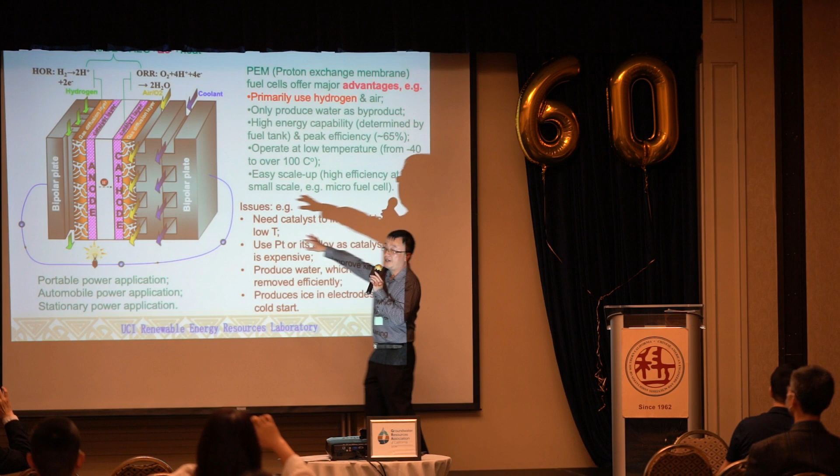Go back to this technology. This device is very novel, innovative, and can possibly change the world in how we utilize our energy, like a Tesla. So if we replace this device with a battery, and instead use a chemical inside of the battery, we put hydrogen gas and air into the battery, and this battery will produce power. Then we release water to the environment, so it's clean.

The advantage here is we use hydrogen as primary fuel, and hydrogen is renewable. It was hurting when I drove from Irvine to this nice 4-star hotel for this conference, because the gasoline price has been hurting in the past 2 months—I think it's a 30%, 40% increase.

The reason is because of this kind of dependency. There's a war somewhere, there's tension in the world, and the price can change almost every day, every moment, with fluctuation. So if we're working with hydrogen, what becomes clean, renewable, or sustainable? It depends especially on renewable resources like solar, and will be pretty much independent of those price changes. Even with the war between Russia and Ukraine, the price will be the same.

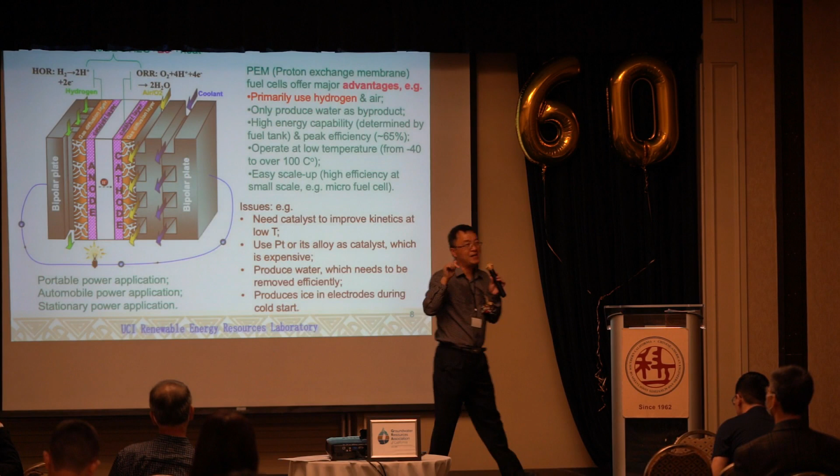Most exciting, the Department of Energy in the US has a target of $1 per kilogram of hydrogen within 10 years. What that means is, if your current driving range is 300 miles, you need 5 kilograms of hydrogen, so you'd only need to pay $5 for the fuel. Again, that's the benefit for hydrogen.

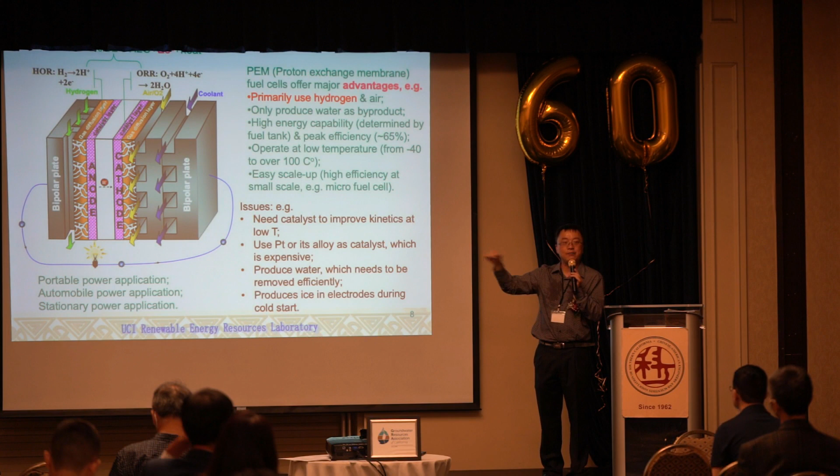Another benefit is efficiency: 65% peak efficiency in practice, and 80% in theory. 50% is normal in driving efficiency, over 50%. Also low temperature operation, minus 40 to 100 degrees C. They easily scale up, just like a battery, put one by one, and you can put a million in a solid state for high power.

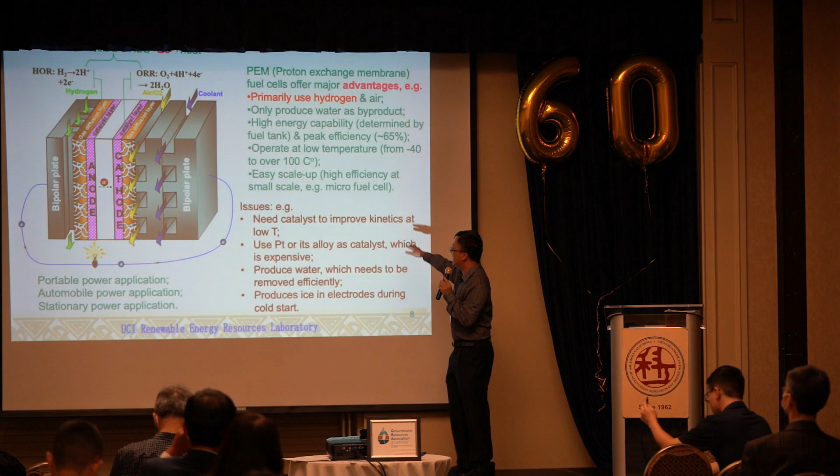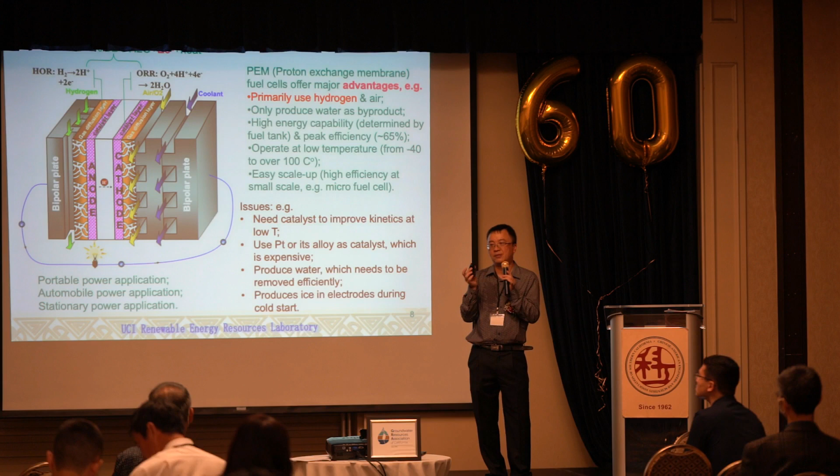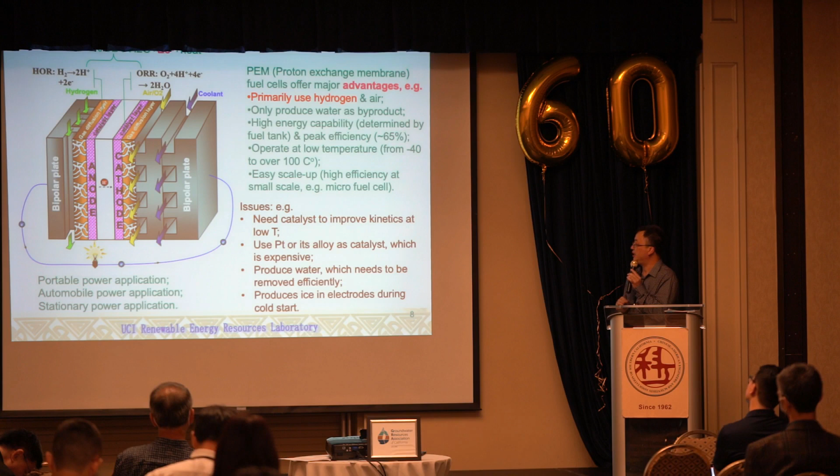So again, there are a few issues here, I listed some for the application. You can see fuel cell is looking for a replacement of battery, right, in our cell phone, even the mouse. If you have a hydrogen fuel cell to power your mouse, then you need to change it in certain containers, because you can have a hydrogen tank cartridge plug-in, which is more energy intensive.

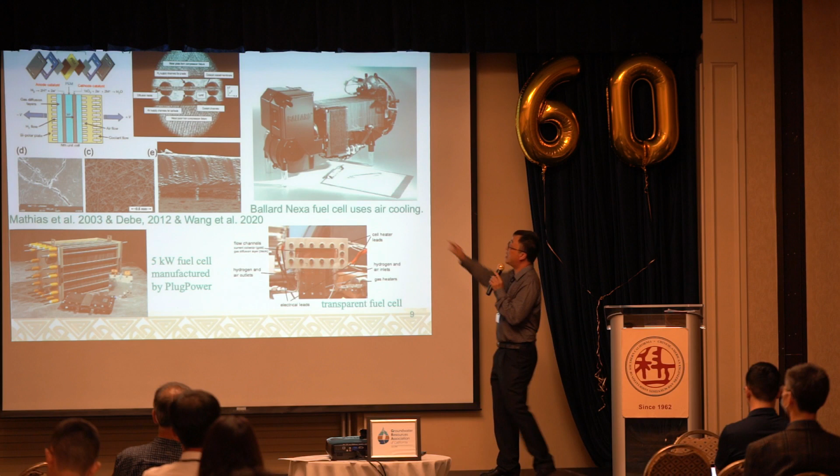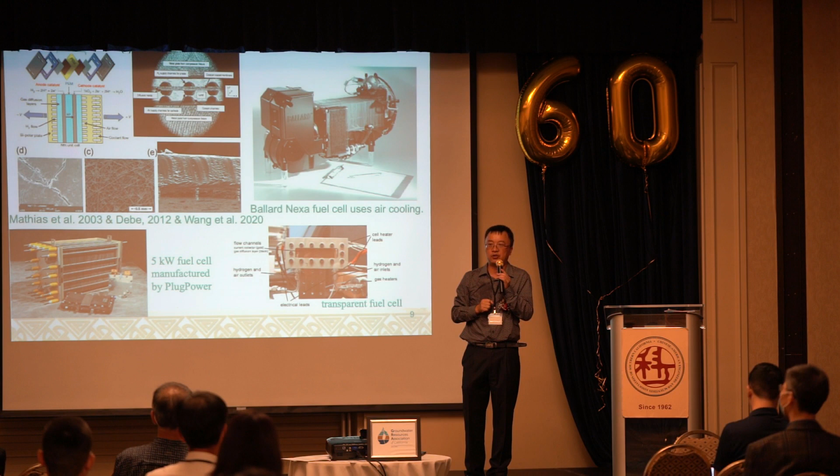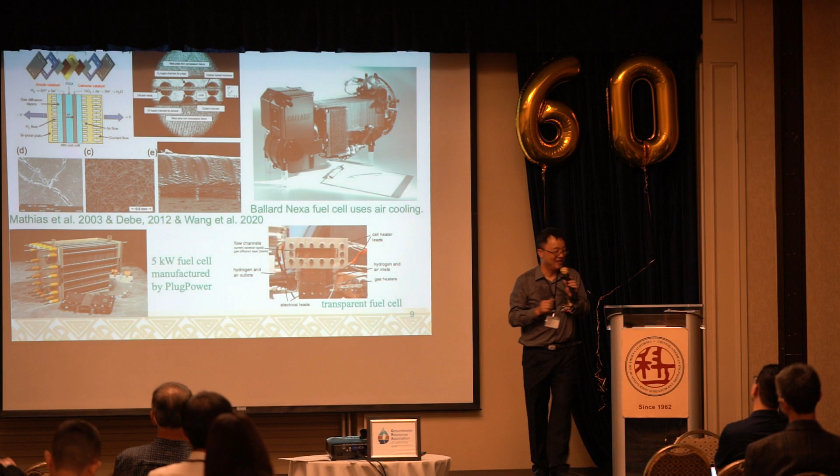Go to the next slide. So it's not just schematic, there's real stuff going on—this is the structure, the material. Again, there are challenges, materials and innovations needed, and we need some funding, and there will be funding and investment coming into this technology. There's also this kind of fuel cell stack, another 5 kilowatt stack developed by a company. If we know the operation principles, we can design a transparent fuel cell and observe what's happening inside.

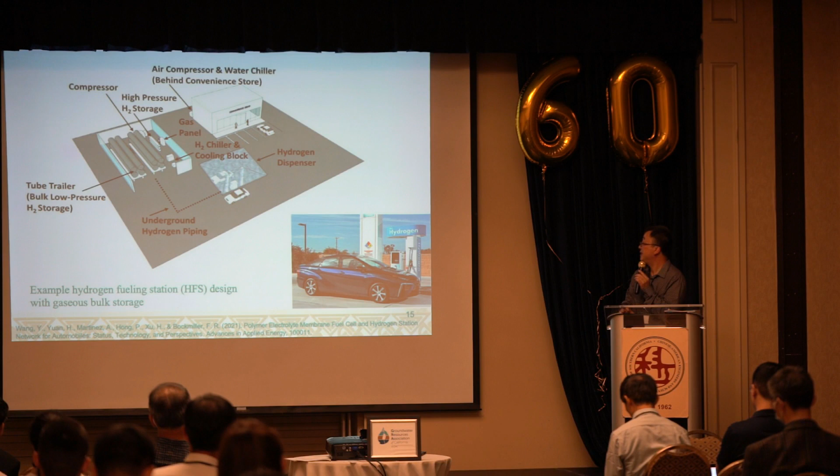It's durable. As I mentioned, the DOE will invest over $1 billion in the following 5 to 10 years into hydrogen hubs, which is very likely going to be in the state of California.

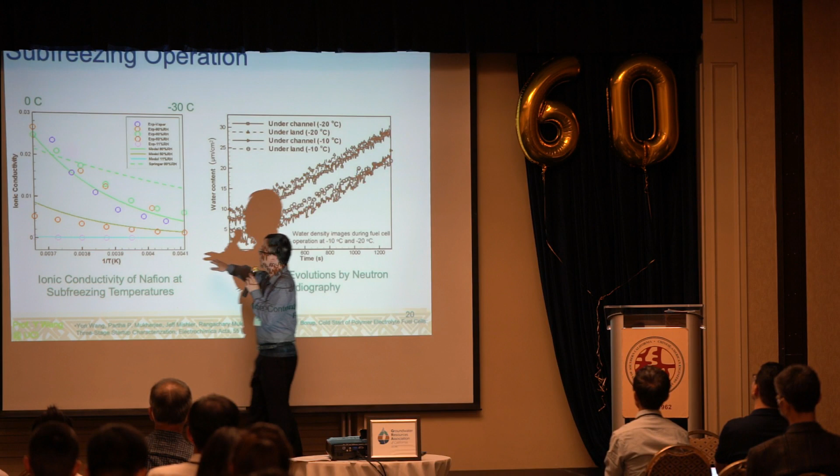The fuel cell needs water to function, the membrane to conduct protons. So we worked under sub-freezing temperature, as low as minus 30 degrees C, and we measured the ionic conductivity of the membrane under different temperatures and different water content. This is our early work.

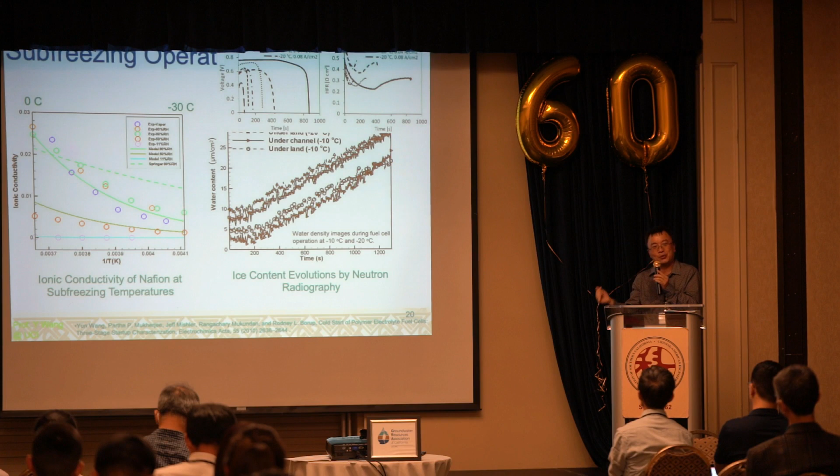You can think about it, and what's going to happen here is this kind of voltage. You can look at this voltage as a battery. First it's steady, and then once there's too much ice inside the fuel cell, it will block oxygen transport to the reaction site, and then the voltage is going to drop to zero, which means fuel cell dead.

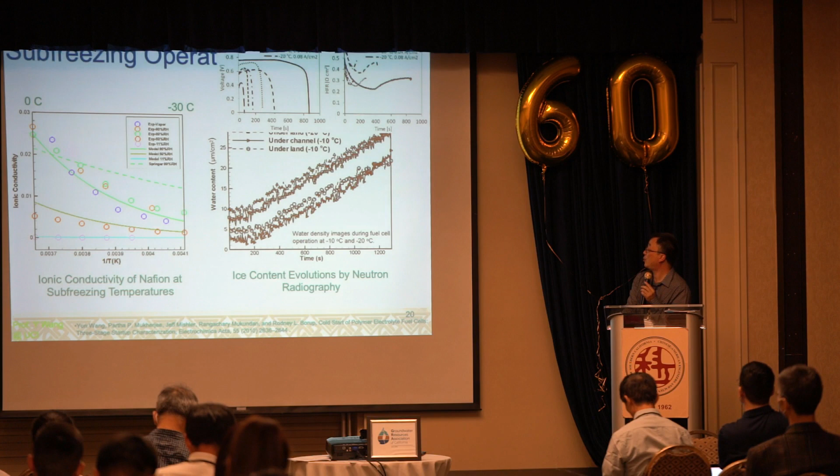So here, that's our work. We do have some fundamental and original contribution to analyze how cold start relates to fuel cell or electrode design, what's the major physics there, and what are the parameters at play. This is the time scale or time constant we provide, to facilitate hydrogen fuel cell development to overcome this kind of environment.

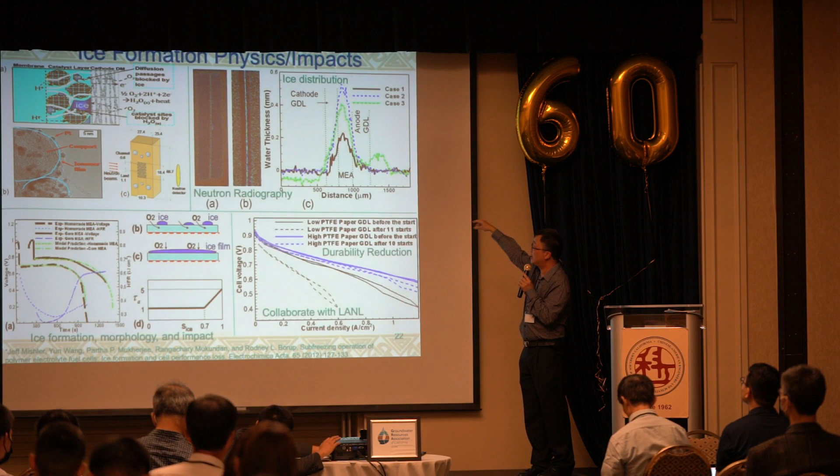So we have some physics showing this ice formation physics impact with neutron radiography, high efficiency, and we also have durability studies to improve cold start performance.

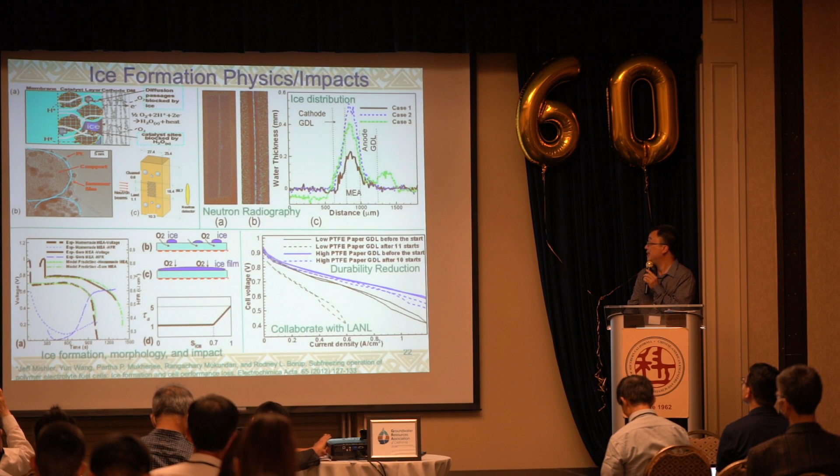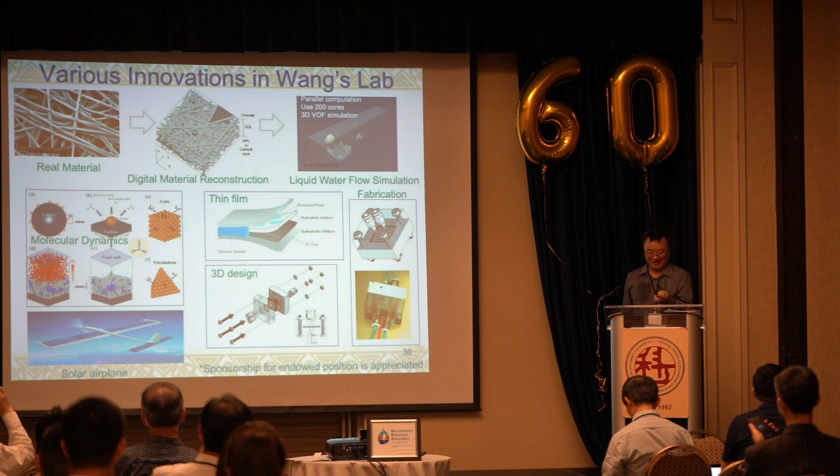It's a very fantastic presentation. I do believe the hydrogen fuel cell car might change the vehicle market in the future. Right now we have 3 minutes for Q&A, please don't hesitate to ask questions.

My question is regarding your safety. Do you have any safety concerns when you use hydrogen with your cell?

That's a very good question. Bringing it back to the safety concern of the hydrogen tank, if you pay attention here, the hydrogen pressure tank is around 700 atm, bars. So it's very high. With this kind of pressure, the tank can hold sufficient hydrogen fuel to support 300 to 400 miles of driving range.

However, we can provide technology to make sure the safety is under control. First, people use carbon fiber to give additional strength to the fuel tank. Technology-wise, this will be 100% okay, and it passes DOE safety code.

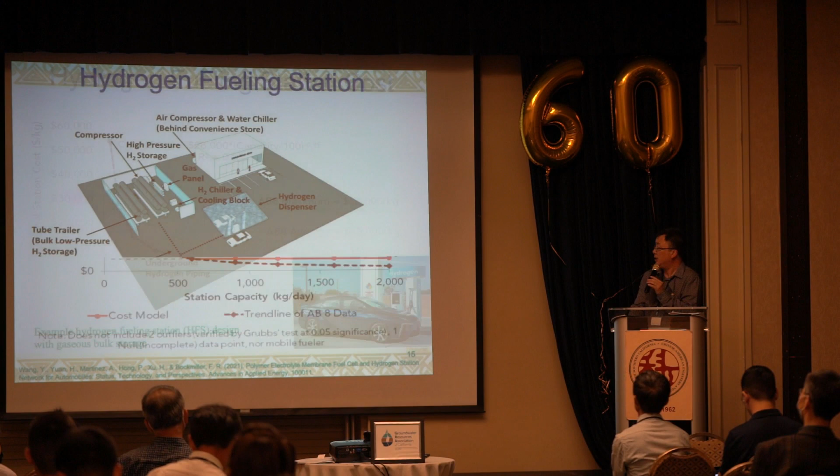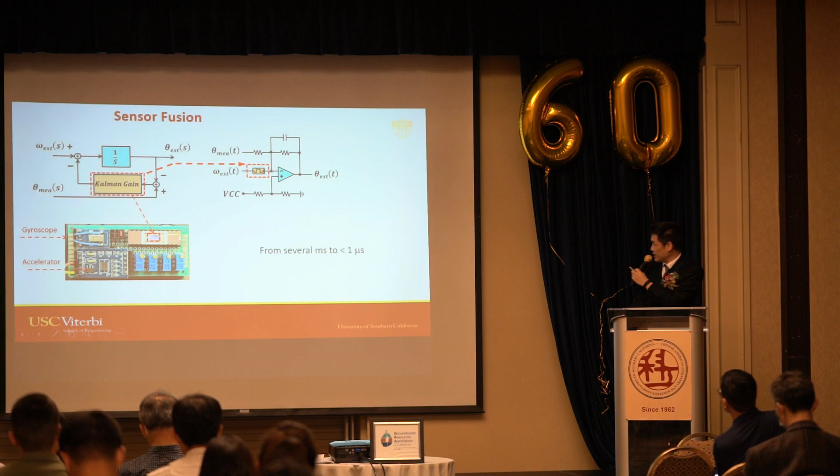It's tunable, so we represent the Kalman gain in the circuit using this memristor, using different resistance values of the memristor. And here's a movie that shows it.

So here on this robot arm, we have our sensors and the Kalman filters. On the oscilloscope, you can see on top the noisy one, that's a direct measurement of your angle. The bottom one is after the Kalman filter. You can see it looks much more smooth with much less noise.

When I showed these results to some of my friends, he asked me, why can't you just calculate what should be the Kalman gain, calculate what should be the value of the resistor, and just put it in your circuit?

Well, it turns out that the Kalman gain is actually determined by the signal to noise ratio of each sensor. And for the exact same model of sensor, the signal to noise ratio may not be the same. For example, we bought from Amazon 4 different gyroscopes, exact same model. If we use the same Kalman gain in the circuit, only gyroscope 2 gives us the perfect condition, gyroscope 1 will undershoot, and gyroscope 3 and 4 will overshoot.

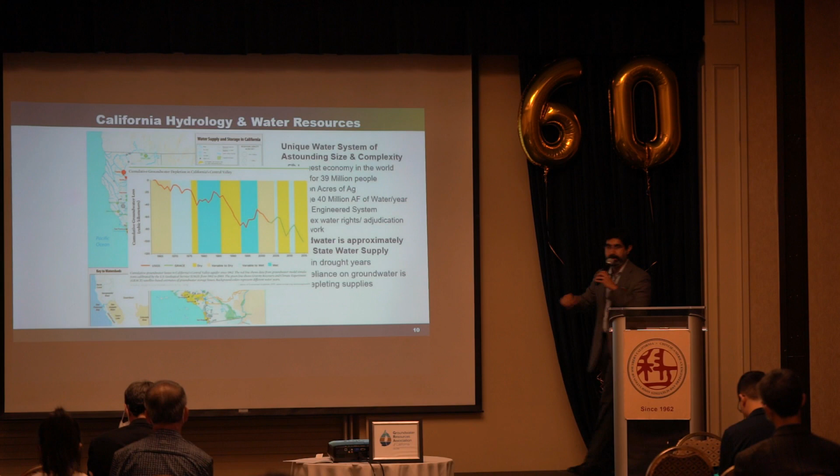So it causes all kinds of issues, and of course, as the supply goes down, we just have less groundwater to tap into during drought years. So this is a very critical issue for the state.

California has a Mediterranean climate. There are very few places in the world that actually have a Mediterranean climate, apart from the Mediterranean, of course, South Africa, parts of Australia. And basically these are characterized by two aspects.

One is that most of the rainfall happens in the winter months. We don't get a lot of storms, we don't have monsoons, for example. I come from India, I grew up in India, and there, in the summer, you have the monsoon rains. This is important because think of when you need water the most. You need it in the summer. In our state, as other Mediterranean states, most of the rain comes in the winter, when you need it less.

In California especially, most of the rainfall is in the north of San Francisco, and in the east, in the mountains, the Sierra Nevadas, where it becomes snow. But think of where most of the demand is. We've got Los Angeles and the greater Los Angeles area, with millions of people. So our demand and supply centers are a little offset.

California water hydrology is driven by ENSO cycles. You hear about an El Nino year or a La Nina year, and these are years where you either have more or less precipitation. We're currently in a La Nina year. It's looking like it's going to continue to be a La Nina year through the rest of this year and maybe next year as well.

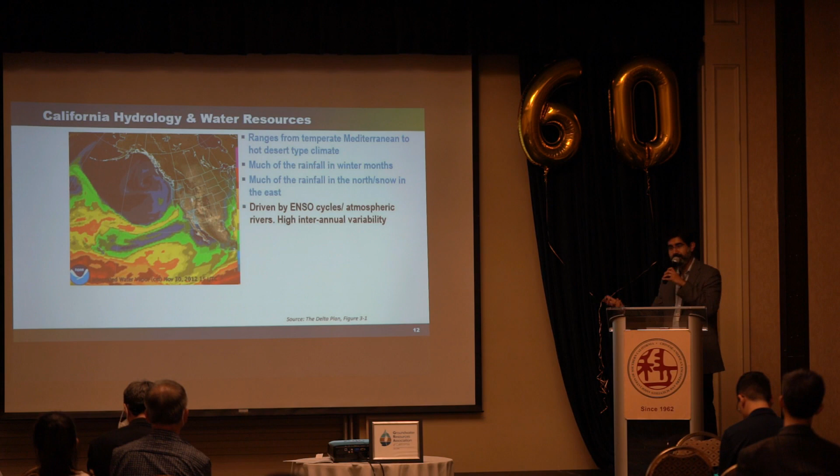And so what this causes is there's a lot of interannual variability. There is really no such thing as an average water year in California. You either have very wet years or very dry years, all right? So you also have an issue with timing.

2022 is looking pretty grim. We've had one of the lowest snowpacks in the Sierra over the last 50 years. So along with this variability, we also have very high water use in Southern California, because that's a big urban center, but also in the Central Valley where we grow most of our crops. So that's a big agricultural center.

And so what California has done, and this has really driven growth and development, and made California the 5th largest economy in the world, is we have a highly engineered system of connecting the dots. We take water from where it's available and we convey it and store it in areas where it's needed. So it's a demand and supply connection across the state.

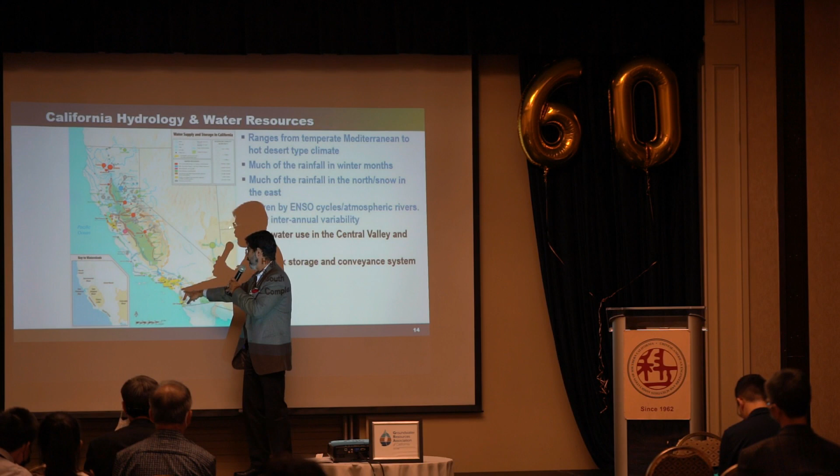We bring water all the way from the Delta near Sacramento down to Southern California. The water is used to feed agriculture in the Central Valley, through the Central Valley Project. We get water from the Colorado River that feeds San Diego, parts of Los Angeles County as well. So we're getting water from these different areas, connecting it to the demand centers, and then managing the timing and the location. It's a very complex storage and conveyance system.

It's also aging. We need to upgrade this infrastructure. I'm not going to talk about that, but that's part of the issue that we're facing in the state.

And what's happening with climate change is that we see a shift in the seasonal patterns. We're seeing less snowfall. The timing of snowfall in the Sierras is changing. We're seeing hotter temperatures early on. The important thing about snow and ice is that it acts as a storage account. You can store water in the Sierras. It melts over time through spring that feeds our rivers and gives us water for drinking water purposes, for environmental purposes, as well as for agriculture.

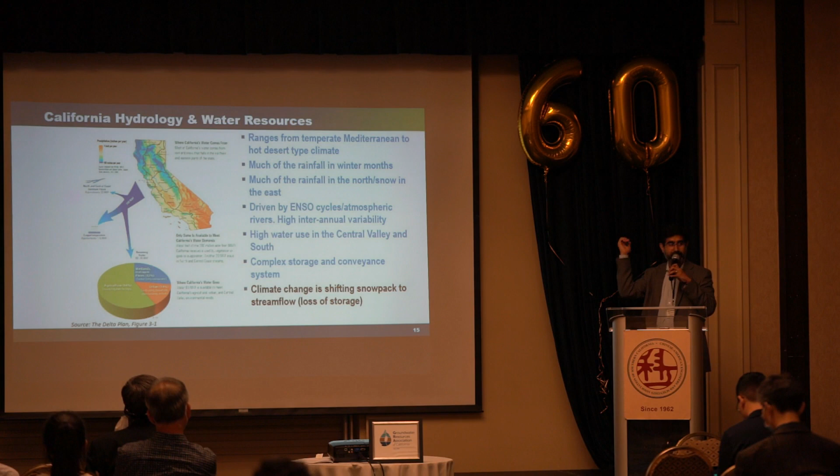So that timing is shifting. We're seeing less and less snowpack in an average year because a lot of that water is now liquid water. And then because of higher temperatures, there's also more evaporation. So we're also losing more water, right? So what used to be kind of a storage account has now become a checking account. You just get the water, it flows out, you gotta capture it, and you gotta use it, or else it's gonna flow into the ocean.

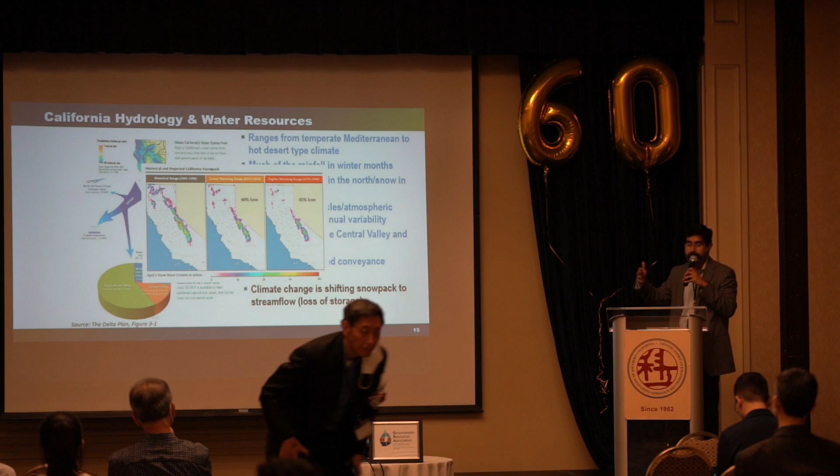So this is a statewide phenomenon. This is just a graphic showing reduction in snowpack over the years. We're projecting almost 65% loss of snowpack by 2070. So over the next 50 to 75 years, we're going to be losing more than half the snowpack that we have in the Sierras.

So that is what I call the California conundrum. Water supplies are typically not where and when they're needed. Conveyance and storage is required, but it's expensive. Climate change is shifting the timing and the type of available water.

I get asked this question a lot: what about ocean desal? That's the solution to all our problems. But ocean desal is still very expensive and extremely energy intensive. And if we need to fight climate change, we cannot be switching to a water source that is very energy intensive. So maybe once we have more green energy, the hydrogen fuel cells that we're using for cars, maybe you can use that to desalinate ocean water. This might become an option for us.

So conservation and reuse is really key to us building a resilient portfolio.

So this is what brings me to the importance of recycled water in California. Reclamation is taking water that has either been impacted or environmentally degraded and reclaiming it, so cleaning it up. Recycling is using that water over and over again, and reuse is where you take water that has been used and then clean it again and put it back into use. These are key to water security in California.

As you can imagine, recycled water reduces vulnerability to drought. You still have that water - if we can reuse more of the water that we're consuming, we'll be less reliant on rain or snow. It's resilient to climate change.

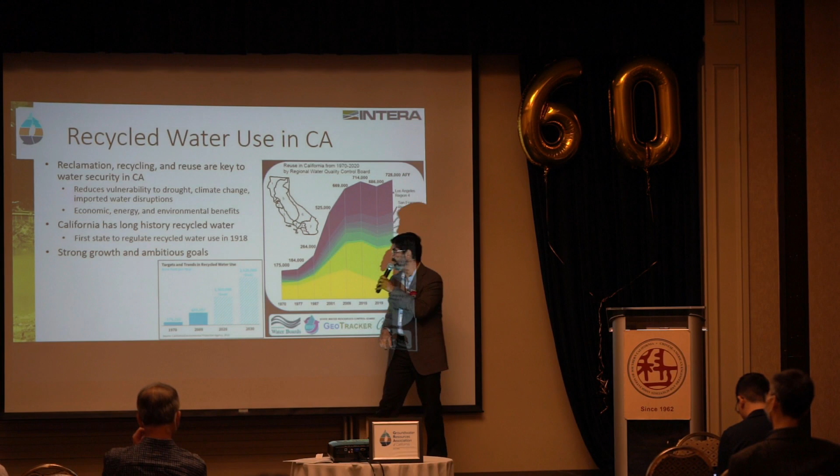So we've already seen exponential growth, and we have some very, very ambitious goals statewide. That graph on the left, we're planning to almost double our recycled water use by 2030. We didn't quite meet our goal of 1.5 million acre feet in 2020 - I think we were about 1.2. So if the state trend continues, we're looking to double the amount of recycled water in the state.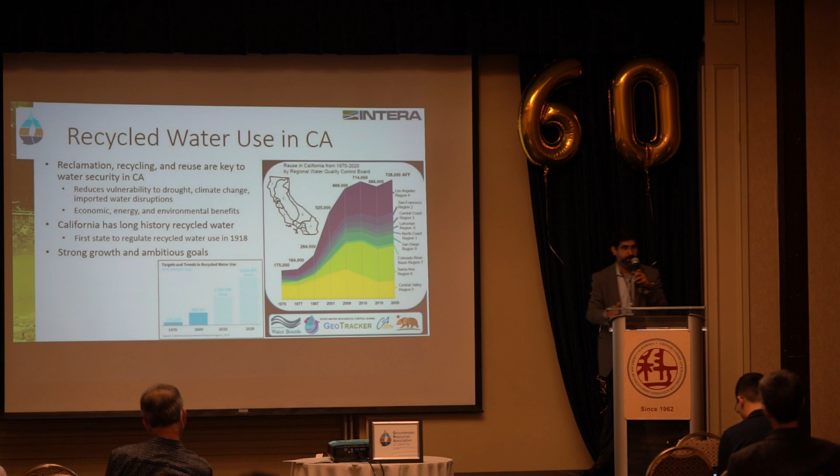All right, so I talked about potable reuse, and what potable reuse means is using recycled water for drinking water purposes. So right away you can imagine that there are safety concerns. This is water coming out of our houses, going into treatment facilities, and so the state has defined a regulatory framework for the reuse of water for drinking water purposes.

Currently the only way you can use recycled water for potable purposes is what's called indirect potable reuse. So it's not direct potable, what's called toilet to tap - we're not quite there yet, NASA is. But California regulates this through the process of indirect potable reuse.

And what that means is you take treated wastewater, water coming out of wastewater treatment facilities, and you push it through an environmental buffer. In Southern California, this environmental buffer tends to be the soil, the subsurface, the groundwater aquifers that we are standing over. And what this does, in addition to the water being advanced treated down to drinking water purposes, is two things.

One is the soil aquifer itself, which filters out bacteria and viruses, and there are biological and chemical processes that make that water safer to drink. That's why groundwater has less dissolved solids, less bacteria, and so on. The other thing it does is provide a buffer if there's some disruption in treatment. Before that water hits your drinking water supplies, it's been in the aquifer, so we monitor and sample it to know before it impacts your drinking water supplies that something has messed up the treatment process, and you can manage that.

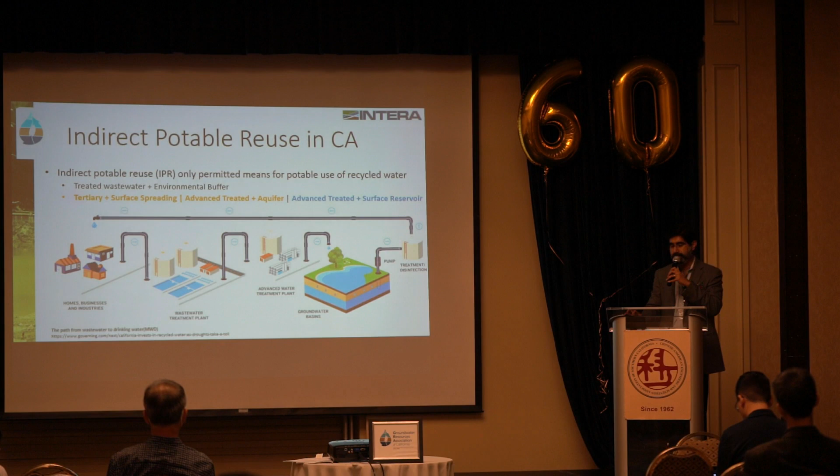In 2019, I believe, California also permitted the use of surface reservoirs. So that is where you take this water and put it into a surface reservoir. Now it still has to sit there for a certain amount of time, a residence time in that surface water body before it can be used. This is not common. The most common are using treated water for surface spreading, where it just percolates into the ground, or injecting advanced treated water into the groundwater basin.

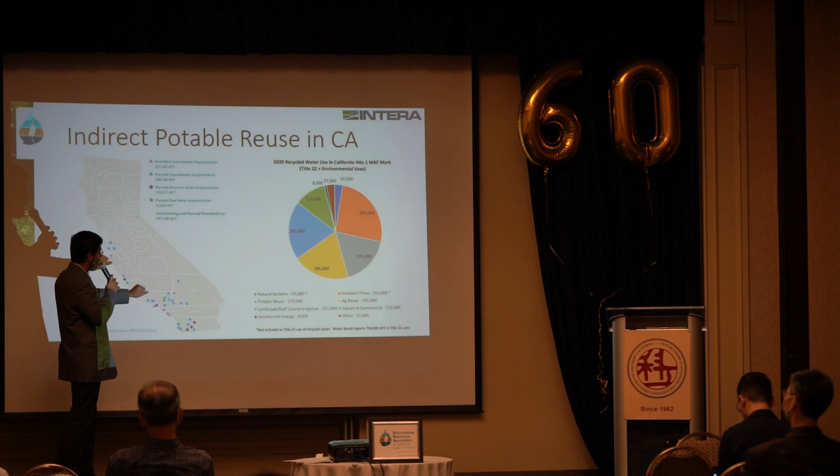And then where we're headed towards is direct potable reuse, where you can take that treated water—of course it's advanced treated, treated to drinking water standards—and put it right back into your drinking water distribution system. So that would be direct potable reuse. And there are upcoming regulations that the state has been pursuing to get to that endpoint.

Overall, if you look at the total balance of recycled water in California, potable reuse—using that for drinking water purposes—is about 20% of the overall portfolio. So it's important, and it's growing. And as you can see, the cluster of potable reuse projects are really in Southern California.

So why is that? Three reasons really. For there to be reuse, there has to be use in the first place. This is a high population area, we use a lot of water, and so we have the opportunity to reuse it. There is water demand, so that water reuse can be put back into urban systems and can feed drinking water demands.

And most importantly, there is a revenue base, right? There are water districts, water agencies, and municipalities that collect taxes, and those go towards the development of these large engineering projects. Water reuse and water recycling is less expensive than desalination, but it is still expensive. It may not be an economically viable option for agriculture, because, like in the Central Valley, you need to build treatment systems, treat it to the advanced treatment side of things, and we don't have those kinds of cost economies.

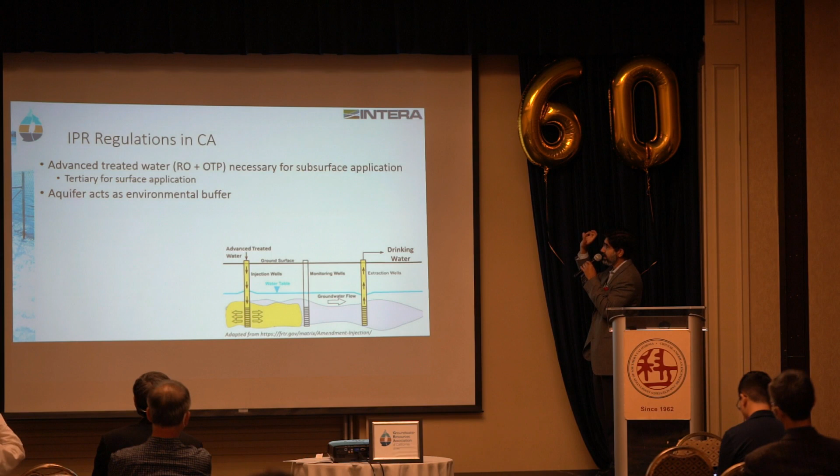All right, so I'll just give you a quick overview of some of the regulatory drivers here. As I mentioned, it has to be advanced treated water—you can't use just secondary, primary, or tertiary water for that matter. It has to be advanced treated.

That means reverse osmosis or some sort of oxidative treatment process is necessary to remove all bacteria and viruses. If it's a surface application, where you're just putting that water on the ground and letting it percolate, you can use tertiary water, which uses chemical processes to chlorinate or uses ozone. It's still not ready for drinking water purposes, so if you're just spreading it on the ground, you can use tertiary water. But if you're injecting it into the groundwater basin, you have to use advanced treated water.

The aquifers I mentioned act as an environmental buffer. This is an example where that treated water is being injected into the ground. It goes into the aquifer and moves towards drinking water wells. You've got to have a lot of monitoring to make sure the water quality is good and safe.

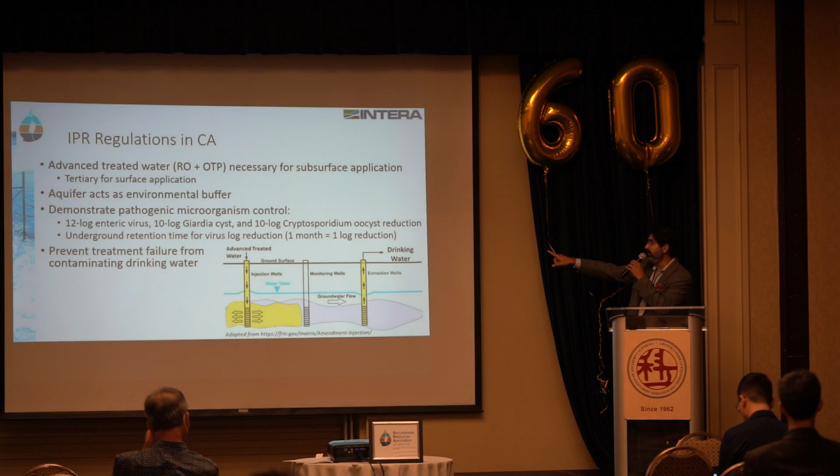There are some very stringent requirements that the state has set, both on the treatment side and the monitoring side. For the scientists out here, the state requires orders of magnitude reduction of pathogen load in the water. You need to demonstrate, through your treatment processes or through the residence time in the aquifer, that you're reducing viruses by 12 logs - several orders of magnitude - and bacteria by almost 10 logs. You can use the underground retention time for this treatment process. The main goal is to prevent treatment failure from contaminating drinking water supplies, because that would be a total catastrophe.

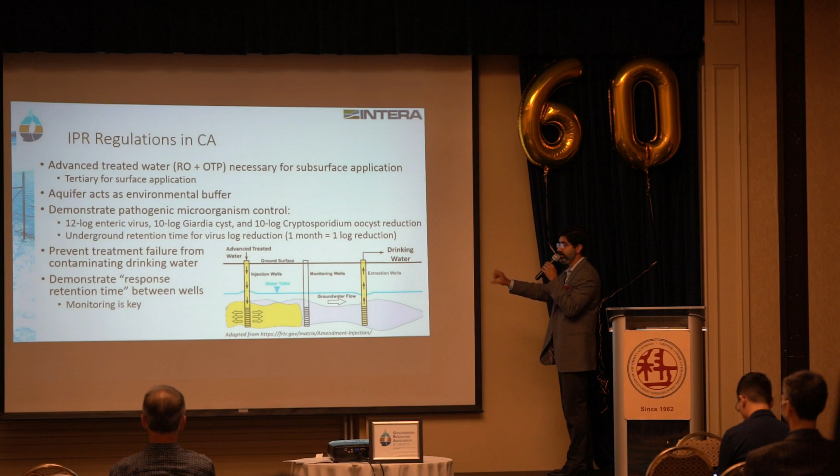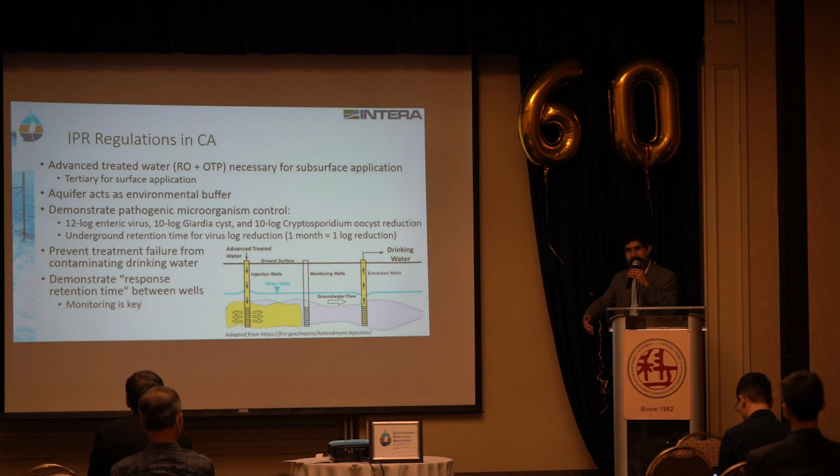A project is required to demonstrate response retention time between wells. Again, this is a bit of a technical term, but think of it this way: we're trying to account for any potential treatment failures in your system. What you need to make sure is that between the time you inject or introduce that water into the ground and the time you take it out of the ground, you've got at least a month or several months between those two events. That is to monitor for any treatment failures and respond to them - that's why it's called response retention time.

All right, I'm going to very quickly run through a few case studies. We're in LA County, and you're surrounded by recycled water projects - these are just a few examples. I've shown a few example projects in LA County as well as Orange County. We've got what's called the West Coast Basin Barrier, a string of injection wells that take recycled water and inject it into the ground.

These wells actually serve two purposes: they protect the aquifer from seawater intrusion - with sea level rise and groundwater levels going down, we have the potential for seawater to enter the aquifer - but they're also taking recycled water, injecting it back into the ground, and increasing the yield of that aquifer. We have three other gaps along the coast: the Dominguez Gap, Alamitos Barrier Project, and the Talbert Barrier further south. Moises is from the Water Replenishment District, I'm sure he'd love to talk about the barrier projects here. They're all run by the Water Replenishment District of Southern California.

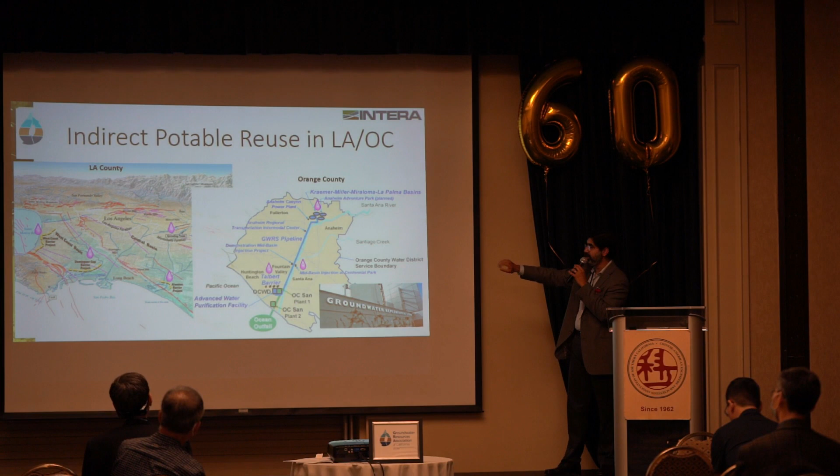And then in Orange County, they have what I think is one of the largest treatment facilities in the world, GWRS, and they're using that to recharge their water as well as maintain the yield of the basin.

So I mentioned the West Coast Basin Barrier Project. This runs all the way from just south of Santa Monica to Torrance. Most of the wells are subsurface, so you won't be able to see them, but there are 153 injection wells that were built between 1950 and 1960 all along the coastline, and they use a blend of recycled and imported water. The imported water is coming from the Delta - I think they mostly use Delta water, I don't think any Colorado water comes to the barrier. As I mentioned, they protect the aquifer as well as recharge it to prevent overdraft.

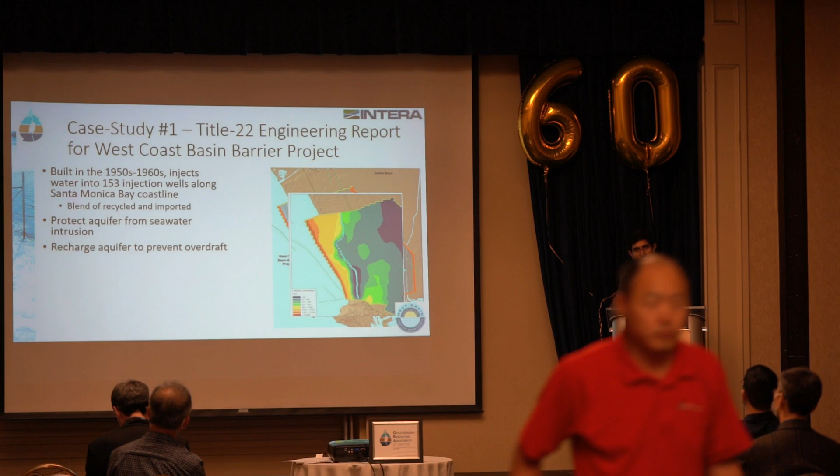This is how we manage to keep the aquifers, the groundwater, in balance in much of the greater Los Angeles area. What I do as an engineer and scientist - this map here is showing chloride concentrations, which is seawater concentration in the aquifer. The hot colors are higher concentrations, the cooler colors are lower concentrations. You can see how the barrier is working to keep the seawater at bay, not letting it enter the basin. That's very, very important for our drinking water supplies.

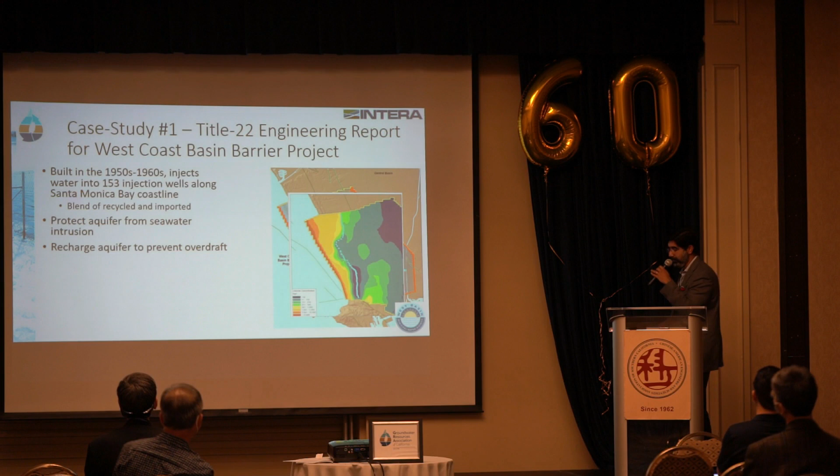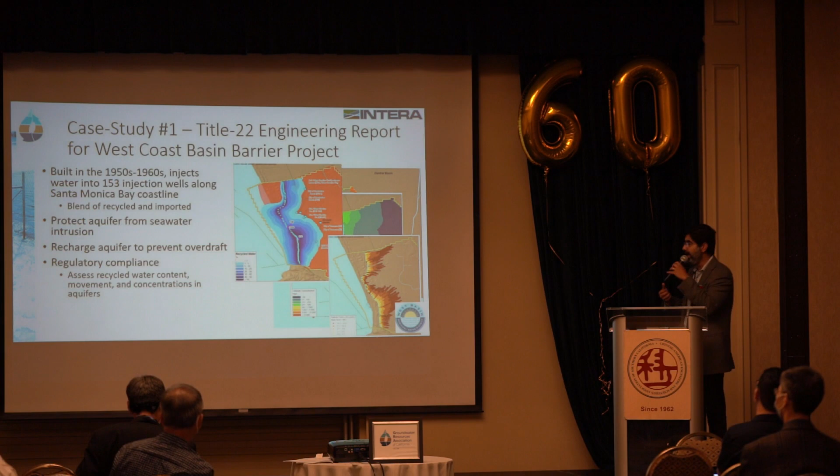So what I do as an engineer and scientist is we build computer models to simulate what's going on with the aquifer and the water quality. We use that to design our projects to ensure regulatory compliance. We look at how much time it's taking for that water to reach the drinking water supplies, what is the best area to put those injection wells, how long can we continue to pump at what concentrations, and so on. There's a lot of reporting to the regulators.

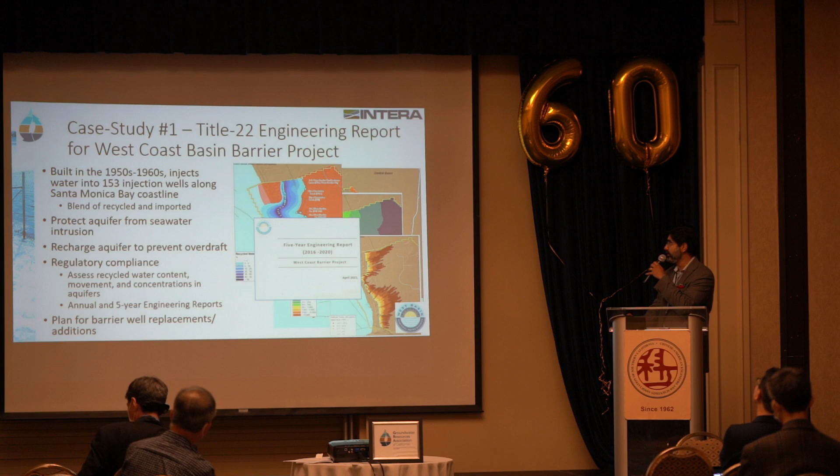With this project, Los Angeles is looking to maximize the production of recycled water from the treatment plant, but most fundamentally improve water supply resiliency and reliability of Los Angeles. They have very ambitious goals to go completely off imported water. This project has been done in partnership with LADWP and WRD, that Moises is from.

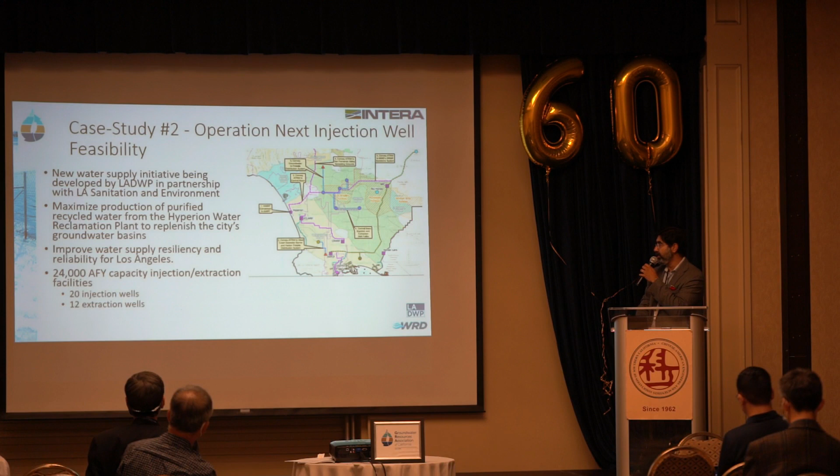We're looking at 24,000 acre-feet of injection and extraction facilities, 20 injection wells, 12 extraction wells, and again we've used a lot of models and data to design the project and look at the feasibility and environmental impact. So with that, I'll conclude.

As I mentioned, indirect potable reuse of recycled water is a critical and growing part of California's water supply. California regulations are meant to balance the need for indirect potable reuse with ensuring safety of drinking water supplies. The aquifer or the soil really acts as an environmental buffer, and we use a combination of very high-end computer models as well as data that we're collecting from the field to design and manage these projects.

California has ambitious plans for IPR and is moving towards direct potable reuse. That regulation is upcoming, and IPR is particularly important in Southern California due to our high water demand, vulnerability to drought, and the existing and future IPR projects in LA and OC.

Riverside is looking at a few projects. San Bernardino County actually has a very ambitious project, almost 10,000 acre-feet of recycled water injection. And those are going to be key to improving our water resiliency and reliability.

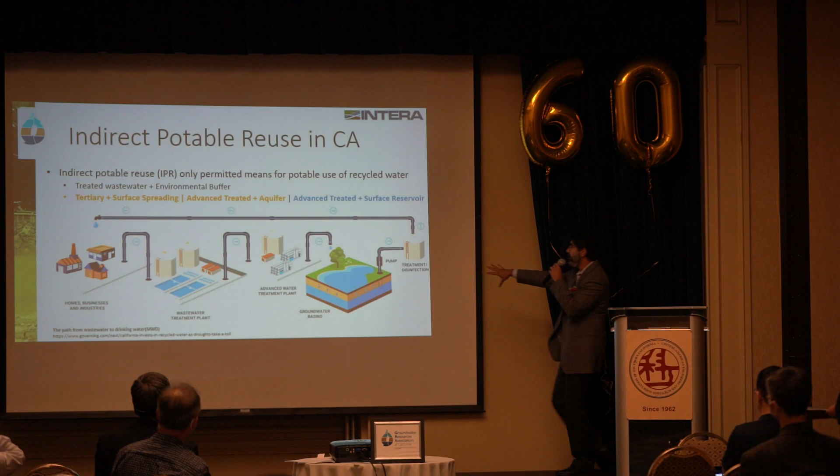That's a great question. As I mentioned, California does now allow for surface water augmentation. We do have the option of surface reservoir augmentation, but the primary reason why subsurface augmentation was permitted first is because the residence time is much slower in a porous medium. So that water is going to sit underground for much longer, whereas if you put it in a lake and there's a treatment failure, you have an immediate impact on aquatic habitat, or if you're using that lake for drinking water purposes. So we do have that permitted now, but the norm so far has been on the subsurface side, though things are changing. As technology improves and we do more monitoring, we're going to move towards more direct uptake of recycled water.

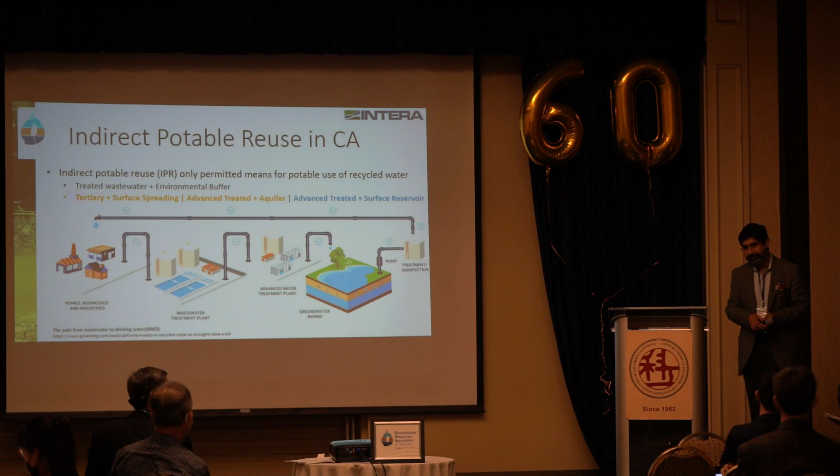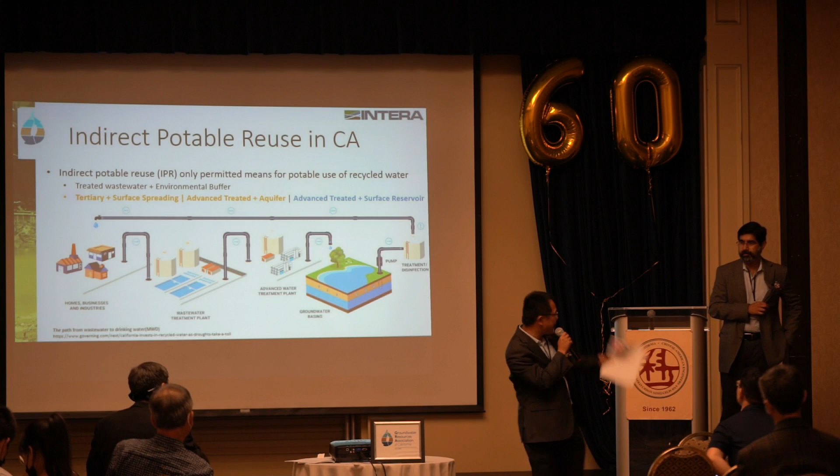Yeah, thank you, very good. Because of the time limit we cannot answer any more questions. If you have any more questions, please ask Dr. Singh later. Okay, thank you.